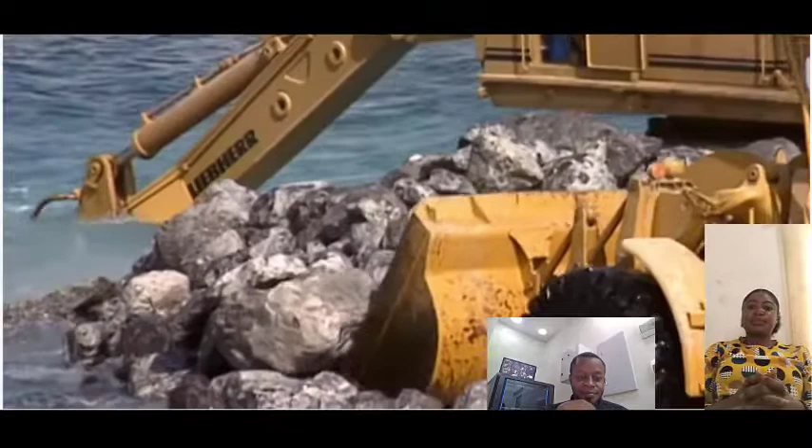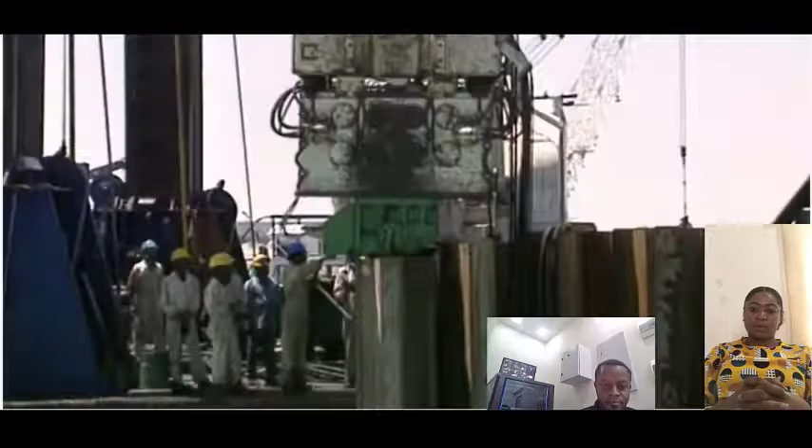In November 1994, construction begins on what is planned as the world's tallest and most luxurious hotel. The pressure is on from day one. With the eyes of the world watching, no one on the project will want to disappoint this particular client. Sheikh Mohammed bin Rashid Al Maktoum, Dubai's crown prince, is the visionary behind this amazing building. The project is his response to the economic time bomb his country confronts, as his close advisor, Sultan bin Sulayem, knows all too well.

He knew that we don't have oil. He knows that oil is going to end someday. And they have two choices. Either go and do something about it and find other alternative ways to sustain the life for the people of Dubai, or sit waiting for help. Only 50 years ago, Dubai's a dusty backwater, home to pearl divers, coastal traders and Bedouin. Then, in the 1960s, prospectors discover oil. The sudden injection of millions of petrodollars transforms the sheikhdom. But geologists predict the oil boom will be over by 2016. The good life could end just as quickly as it began, when the wells run dry.

The answer to Dubai's economic survival lies in its geography. This tiny emirate, less than twice the size of London, is in the remote Arabian Gulf. But Dubai has three untapped assets: sun, sand, and sea. Facing future economic meltdown, Sheikh Mohammed makes a crucial decision. He will turn his country into one of the world's most exclusive holiday destinations, a playground for the rich on the Arabian Gulf Coast. The Sheikh needs a luxurious centerpiece to launch his country into high-end tourism. He stakes what some speculate is over $1 billion on the tallest, most lavish hotel in the world, with a unique 7-star reputation, the Burj Al Arab.

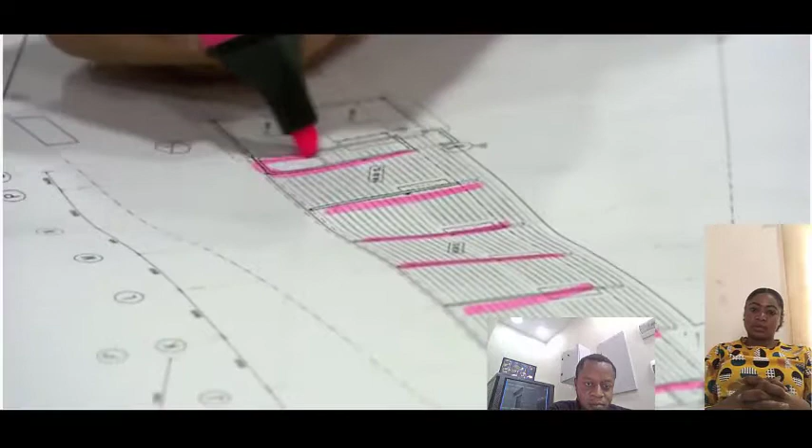Tom Wright and his colleagues have a reputation for innovative engineering, but they're more used to designing schools and offices. But Dubai is a place where connections can make all the difference. Through a contact in the ruler's office, the team gets its break. Sheikh Mohammed agrees to a meeting and is so impressed with their initial concepts, he awards them the contract.

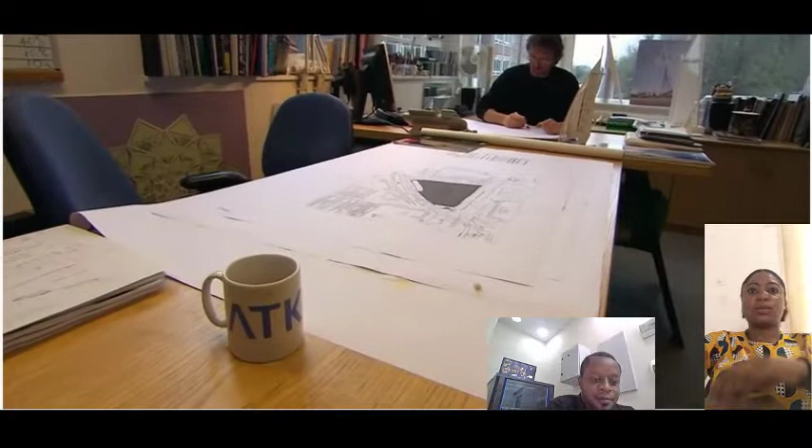Now Wright must turn his sketches into a design so remarkable, the building becomes a world-renowned landmark. We had many sleepless nights worrying that the building we'd designed wouldn't turn out to be at all iconic. Wright knows he must push his design to the limits. A building only becomes an icon when its form is simple but unique.

We decided that if you could draw a building simply with a few strokes of a pen, and it was instantly recognizable as not only the building but the place, Dubai in this case, you'd created something that was iconic. So if you consider these buildings in the world, there are probably no more than 10 maximum that have actually achieved this status.

Australia, Sydney Opera House. As with all these buildings, it's usually just the first couple of lines that actually make you know exactly where the building is. Paris. And you have to put a flag on the top. Can Tom Wright and his team compete with the likes of Gustave Eiffel? This is a once-in-a-lifetime challenge.

All the brainstorming pays off when Wright finally has his eureka moment. We were sitting there having a beer, watching the modern sailing yacht come out of the Dubai Offshore Sailing Club. You think of excitement, you think of exhilaration, and we went, hey, this must be the one. The form we came up with is very simple, and within a few lines, I think you can see that it has all the elements of an iconic building. It's simple and instantly recognizable.

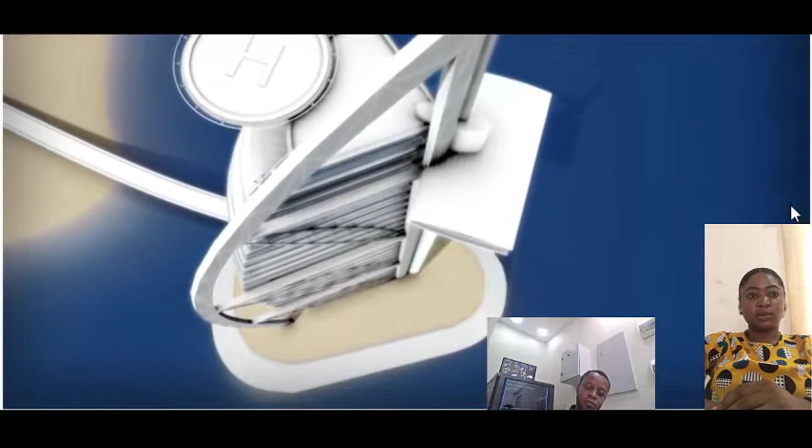This 321-meter structure, weighing 250,000 tons, will need to stand firm against earthquakes and Gulf storms. Wright has won the first of many battles. The Burj will rise out of the sea. But time and again, his refusal to compromise will force his colleagues to push the boundaries of engineering to the limit. By early 1995, the construction team is hard at work on Phase 1, building a low-lying island.

But the inexperienced architects are about to get a taste of Dubai's extreme weather. April the 27th. A powerful storm known as a shamal sweeps across the Gulf, hitting the coast with a vengeance. A set of construction barges lie in its path. Each is laden with 10,000 tons of rock. The architects have planned for all weather conditions, but the storm's intensity still shocks Simon Crisp. We had 3 or 4 metre waves bashing onto the beach. To see the waves coming in like this was really quite a wake-up call for us.

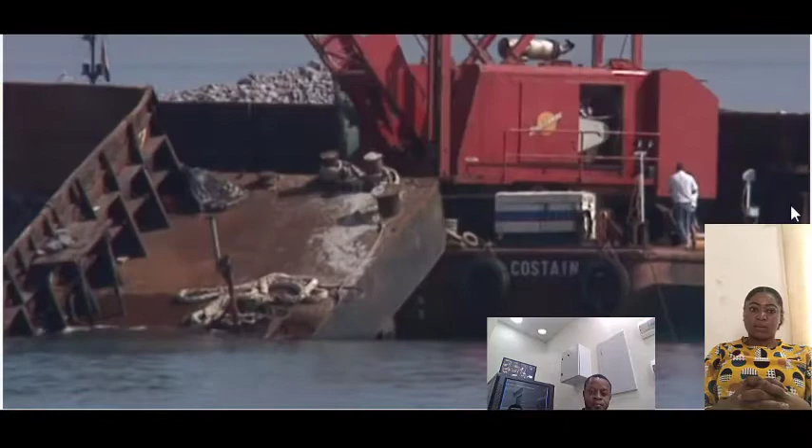One huge barge breaks loose and slams into the mainland. The team realizes the damage this kind of storm could inflict on their island hotel. We had a really graphic example of how powerful the Arabian Gulf can be when it's angry. The architect's decision to expose their structure to these forces could have serious consequences. The engineers will have to struggle to produce a low-lying island capable of resisting nature's fury.

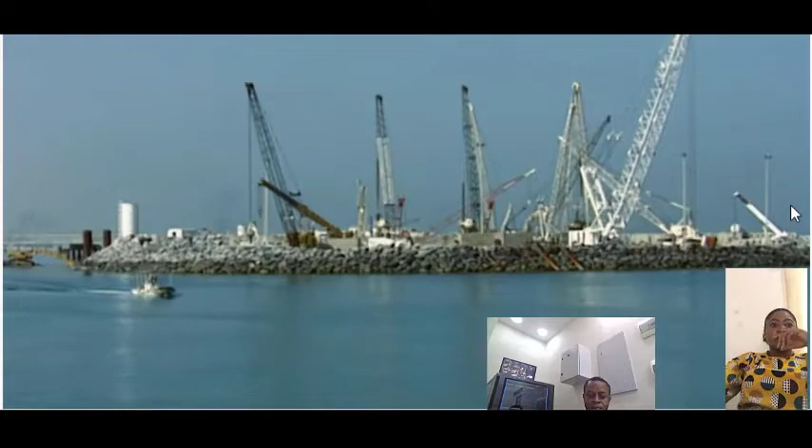The man-made island for the world's tallest hotel has hit a critical stage just 5 months into the build. Dubai's Sheikh Mohammed is depending on this project, the Burj Al Arab, to convert Dubai to a top-class tourist destination. But a debate rages over the island's height. Architect Tom Wright wants to make it low to give the impression of a sail rising out of the water. We argued a lot about the height of the island. From a design point of view, I wanted people to be close to the sea.

From the start, he's gone head-to-head with engineer Mike McNicholas, who's responsible for the island's safety. So I wanted the island as low as you possibly could, you know, skimming the sea. I'm coming from the other end, needed to make sure we were protecting the island. McNicholas's worst fear is that waves breaking over the island could damage the hotel or even drag guests into the sea.

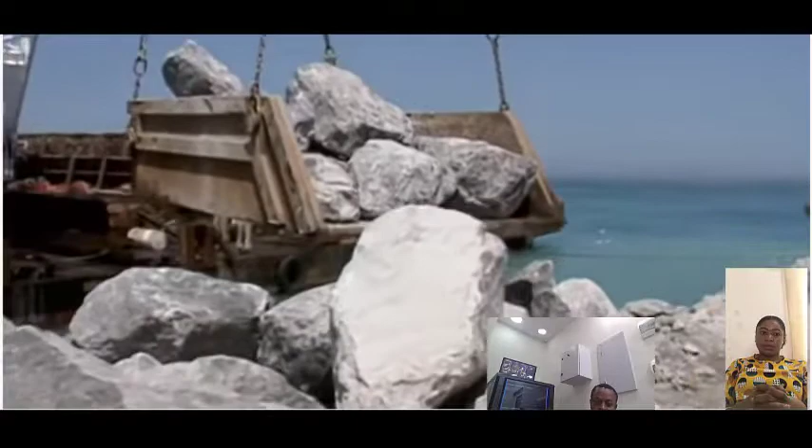Initially, the engineers planned to build the island using rocks. They are available locally and the technology is proven. But Wright rejects this. A rock island would have to be far too high to repel the sea safely.

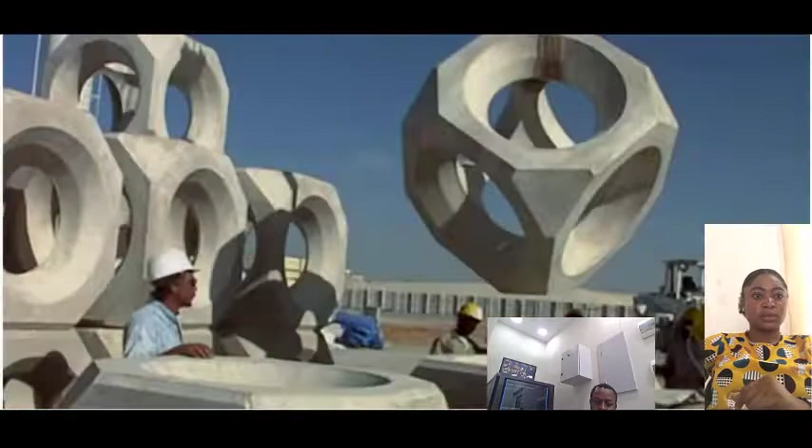To keep the island low, McNicholas experiments with pioneering concrete blocks designed to reduce the impact of waves. But no one in the Gulf has ever used these blocks before. I had to insist with the team that we carried out tank testing. It was the only way we were going to be sure that the island would be safe.

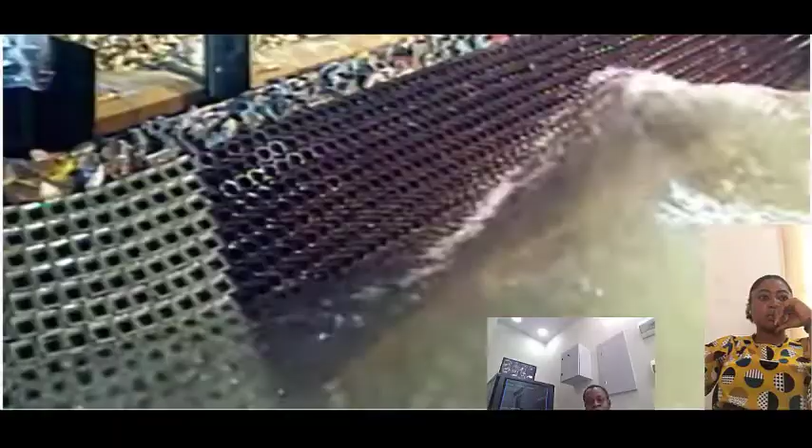These tests replicate the power of the tallest waves that can occur once in 100 years and send them crashing into a series of differently configured models. 3 weeks of testing prove the hollow blocks will work.

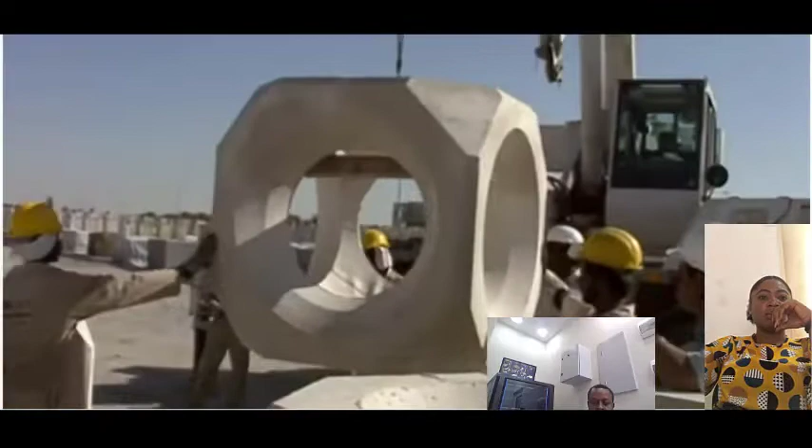The construction team builds the island with steep rock slopes, then covers them in concrete armor to absorb the force of the waves. These ingenious blocks work like a sponge. As the wave hits, the water passes inside the space and turns around on itself. The force is largely dissipated.

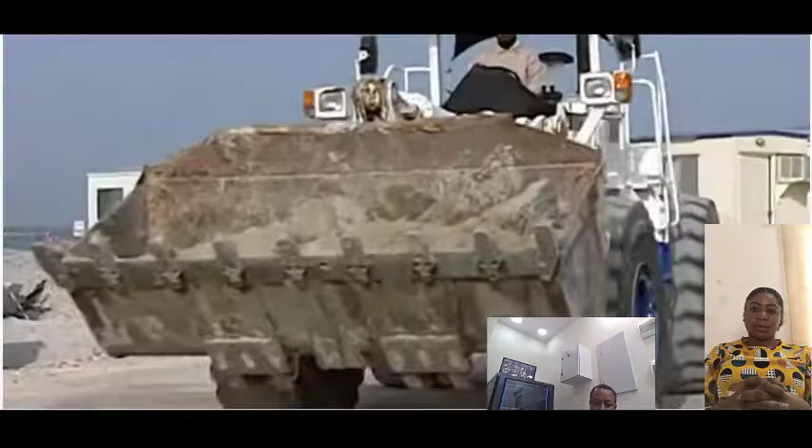With the engineers' help, architect Tom Wright has won his battle for a secure island that rises only 7.5 meters above the waves. Now the team begins the second stage of construction.

In the center of the island, construction workers drive huge lengths of steel 20 meters into the ground. This creates a triangular steel wall known as a cofferdam, which will become the outside of the hotel basement once they excavate the sand from inside. But removing the sand could be dangerous.

That was a real challenge for us. It's sleepless days and nights, 7 days a week. How we were going to stop the seawater coming into the structure, how we were going to stop the seawater coming around our structure from beneath and flooding it.

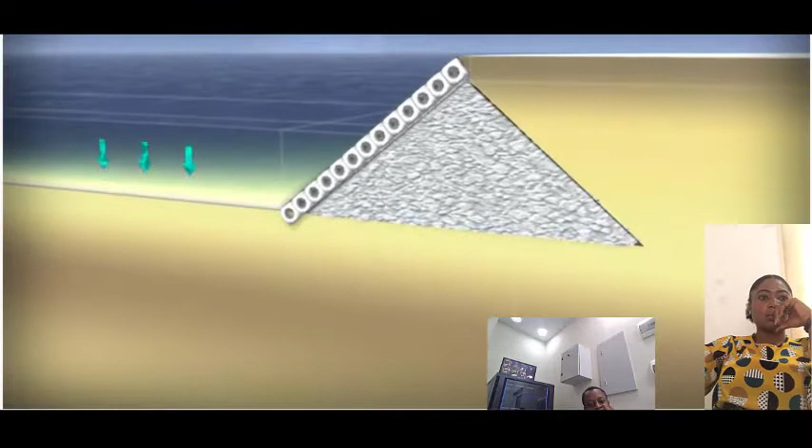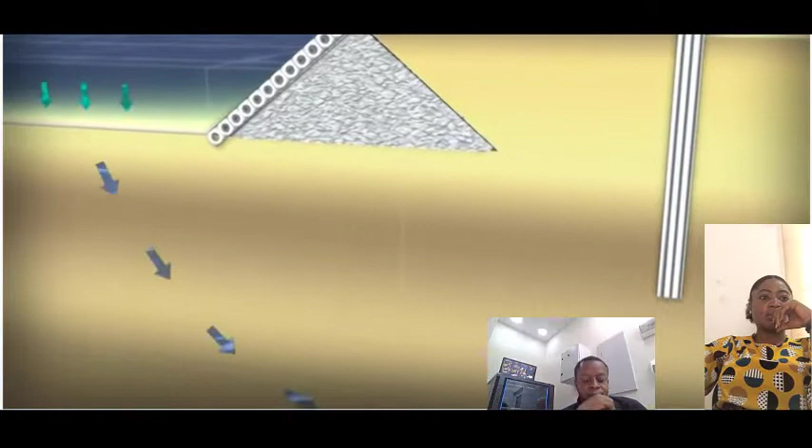The weight of the sea is a huge force on its bed. This pressure forces water through the sand and threatens to flood the artificial island from beneath. To keep the sea out, McNicholas injects liquid cement into the sand to seal off his steel wall from below.

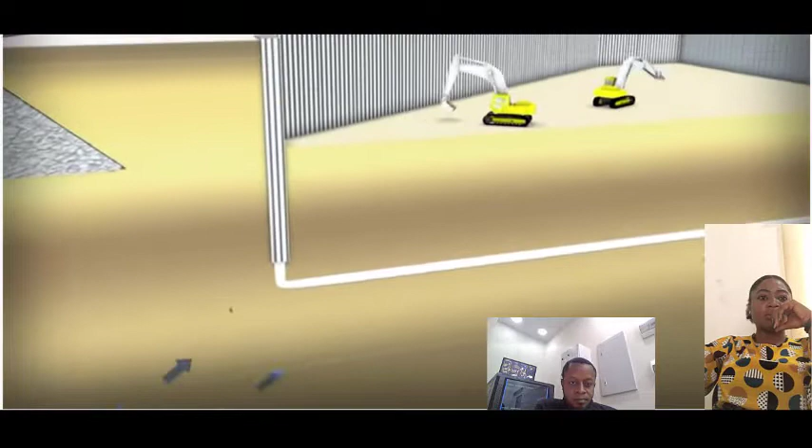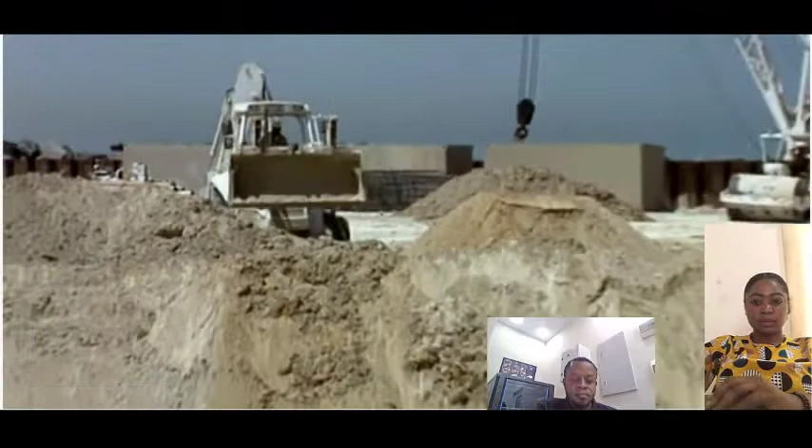But as the sand is removed to form the basement, there's less and less weight to hold back the force of the sea. The cement seal is going to be tested to the limit. In the worst case, the pressure caused by that water movement could have blown the whole bottom of the excavation like a champagne cork. If McNicholas's calculations are wrong, the excavation could be swamped, killing hundreds of workers.

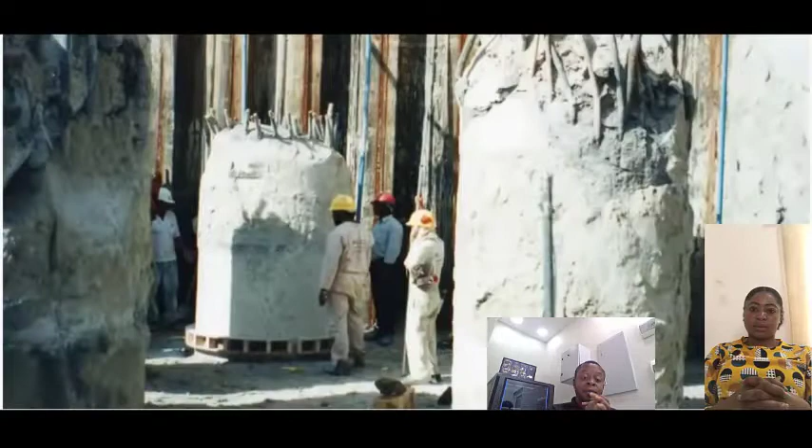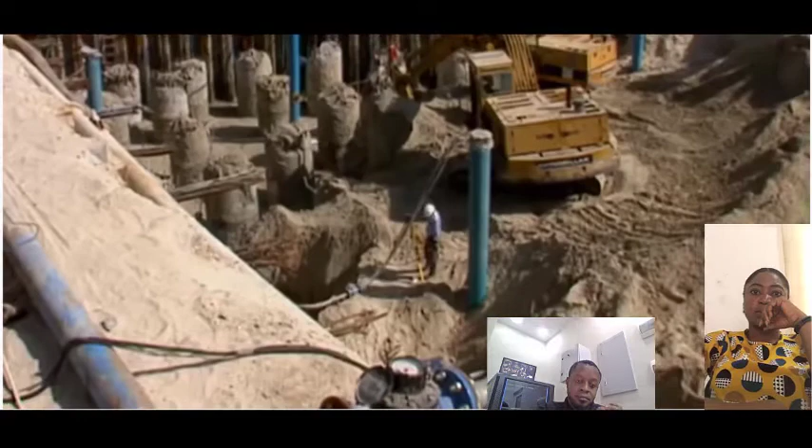But he stands by his design. With the cement seal in place, the excavators begin to remove the sand. As the man responsible, he's not going to let the workers face the risk alone. I felt I had to be one of the first guys down at the bottom of the excavation, looking up 10 meters above myself, thinking, each side of this cofferdam is 7,500 tons of sea pressure pushing in.

When put to the test, both wall and seal hold firm. And one of the probably proudest moments of my career was being stood on that excavation and looking around and seeing the steel wall there surrounding me and thinking, we are holding back the sea. My design worked.

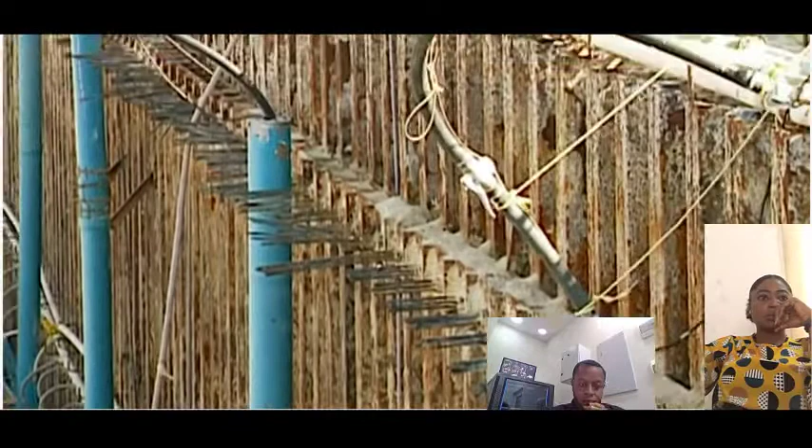November 1995. The artificial island for the tallest all-suite hotel in the world is now complete. The construction team starts phase 3 of this one-off project, the foundations. The support needed for any skyscraper is vast. But the location of the Burj Al Arab presents an added challenge.

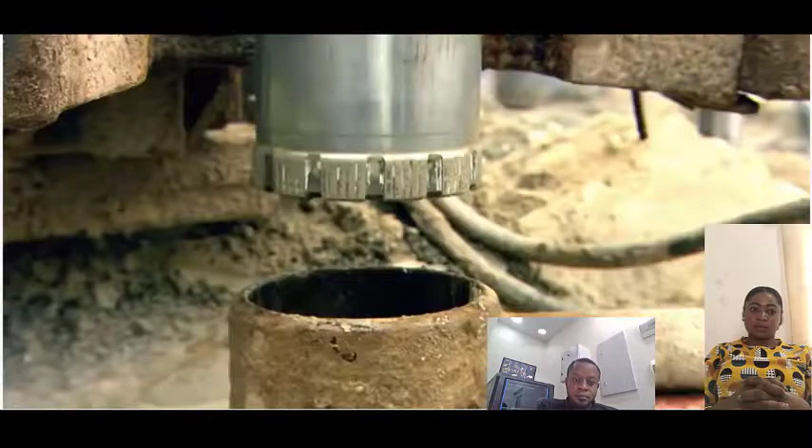It had never been done before to build something like this on reclaimed land. I mean, we're talking about a 300-metre high tower on a man-made island in 6 meters of the Arabian Gulf. The problems multiply when the results of earlier core tests reveal bad news. The team searching for bedrock drilled deep into the seabed. But even a full 180 meters down, there was no solid rock.

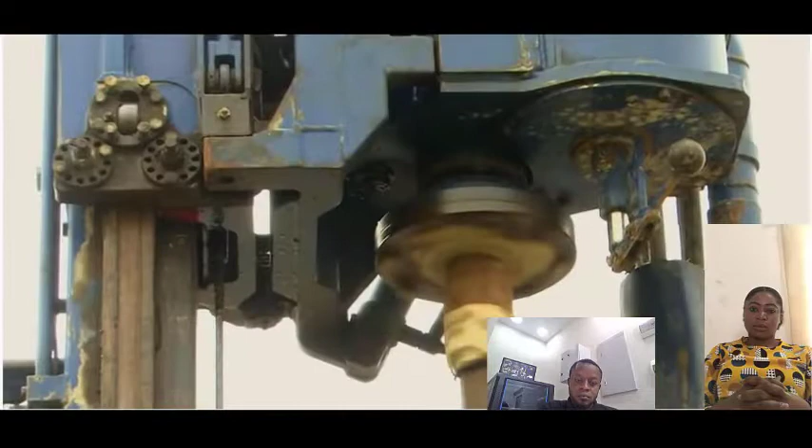This will make their job tougher, but the architects remain defiant. The average person would think we're crazy to build something like this on sand, let alone out in the water. How will this 300-meter structure stand firm against earthquakes and winds of close to 150 kilometers an hour when its foundations depend on nothing more substantial than sand?

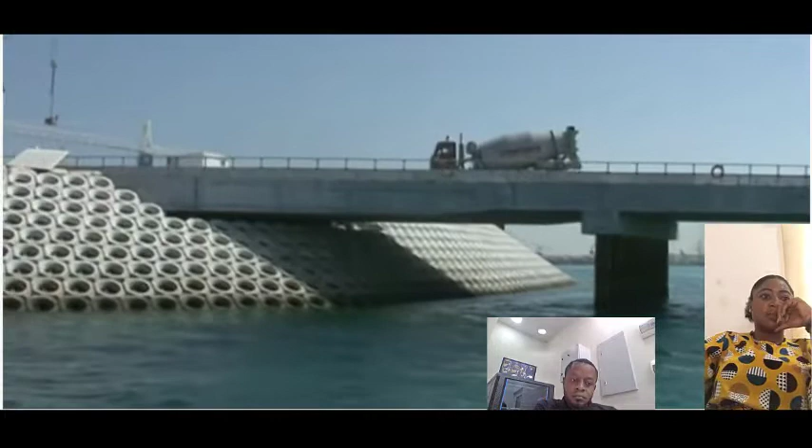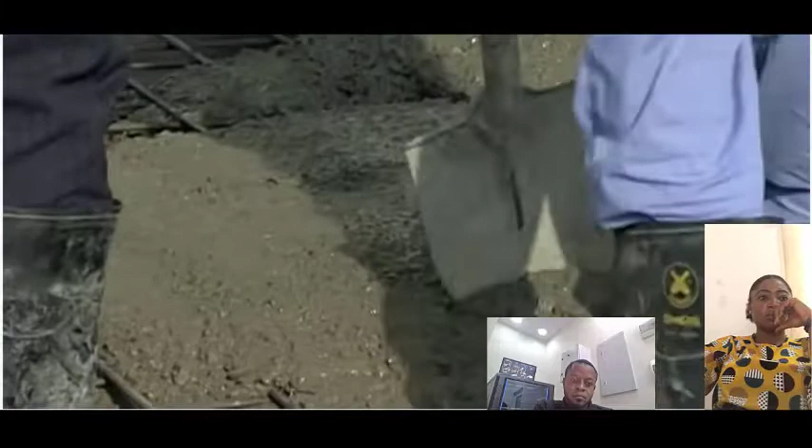On an artificial island 280 meters off the coast of Dubai, construction workers are preparing the ground for the tallest hotel in the world, the Burj Al Arab. But there's no bedrock beneath the site to support the foundations for a skyscraper. The architects have a plan. They want to support the Burj using steel-reinforced concrete foundation piles drilled deep into the sand.

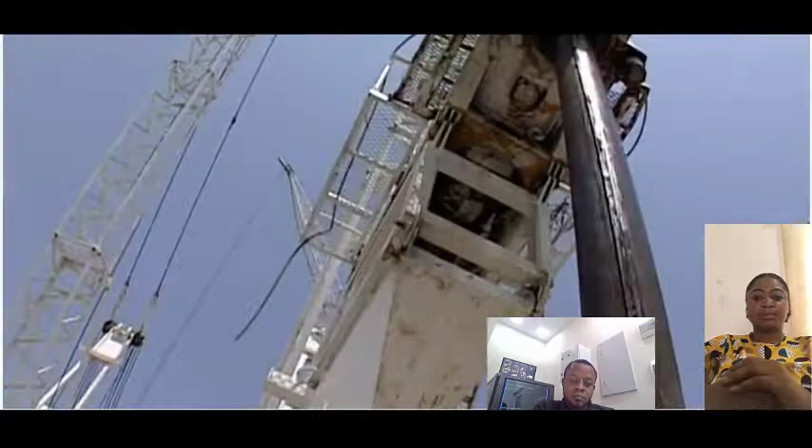So, what's to stop the whole structure from just sinking? They are relying on an effect known as skin friction, the resistance that stops two rough surfaces slipping past each other. Skin friction is all about the contact between the sand and the surface of the pile. And the longer the pile, the further in the ground it is, the greater that effect. And I'm going to demonstrate it now by whacking it in.

You'll see it starts to move quite quickly with the first few impacts. Now it's starting to stiffen up a bit, even though I'm not hitting it any harder or any softer, and the skin effect is starting to really kick in here. Once the friction between the post and the sand around it equals the load of the hammer, the post comes to a halt.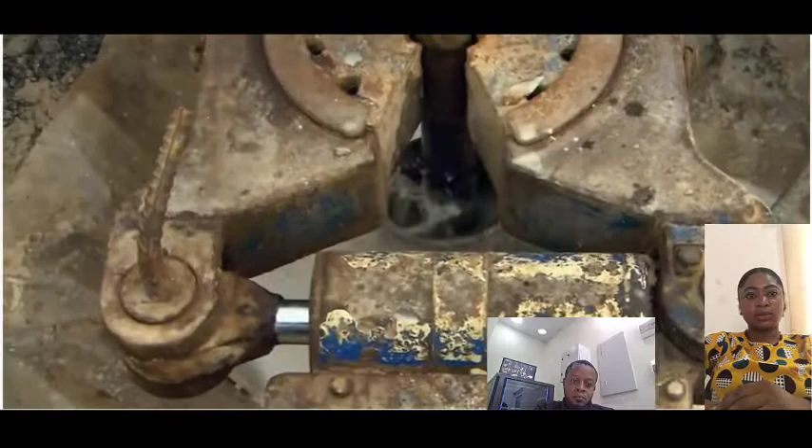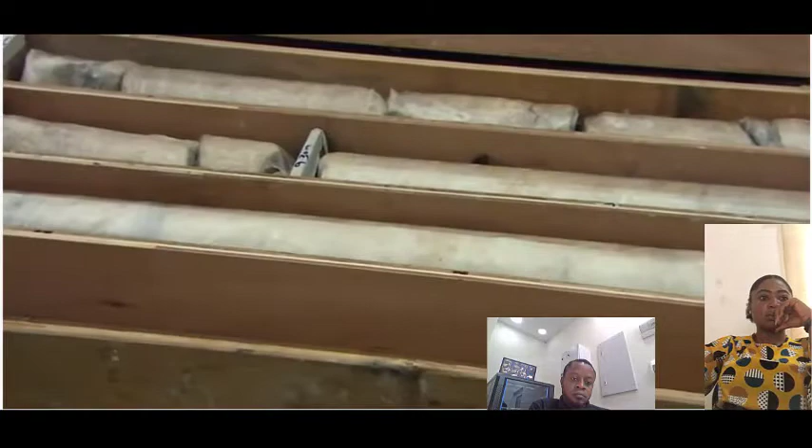The CRISP scheme will only anchor the Burj if the sand is compacted enough to create resistance around the building's piles. The drillers pack sand samples into sealed containers and send them off to be analysed. If the results show the sand is too loose, then support on the piles anchoring the building could suddenly fail. The geography of Dubai gives everyone reason for concern. It lies within range of a major fault line, so this soaring megastructure could be vulnerable to earthquakes.

1964, a 7.5 magnitude earthquake hits Niigata in northern Japan. Because the area is built on sandy silt, the tremors flip over entire apartment buildings. This isn't normal earthquake collapse. It's a devastating phenomenon known as liquefaction. As grains of loose sand shake, they fill up any air pockets and compact, taking up less space. The ground stops behaving like solid earth and acts like a liquid. On shifting sand, any building could simply topple.

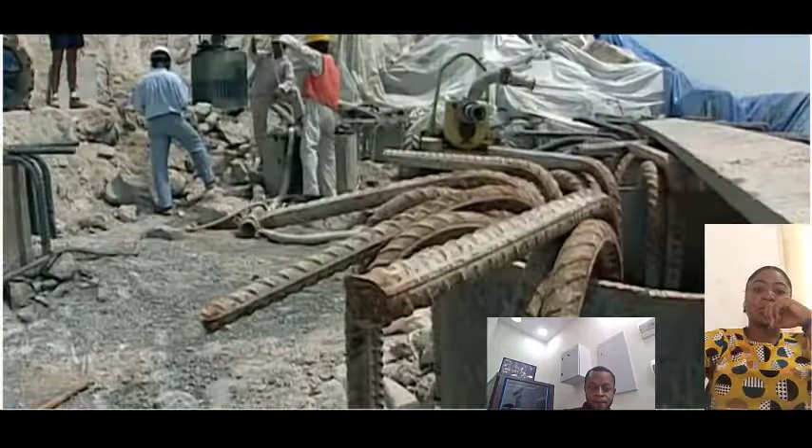When the results of the drilling tests return, it's good news. Deep beneath the site, they find compacted and calcified sand. Liquefaction is not a threat. But will the foundations be long enough for the skin friction to hold them firm? We weren't going to take any chances, and we extended the piles by another 8 metres. CRISP specifies foundations over 20% longer than originally planned. These 250 concrete piles have a combined length of 10 kilometres, 35 times as long as the towering hotel they will support.

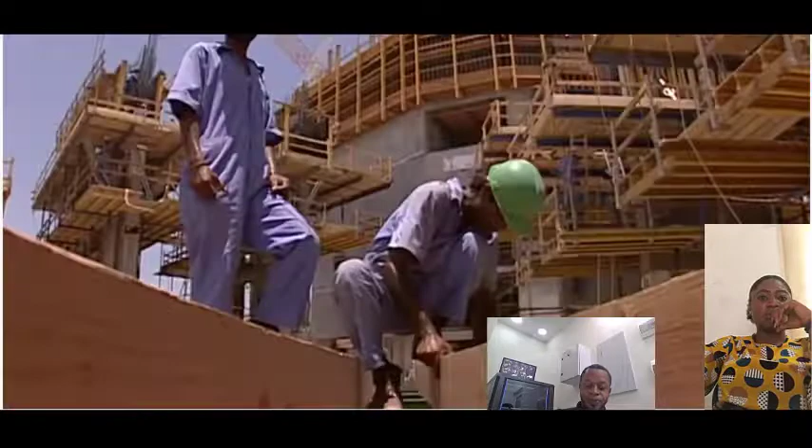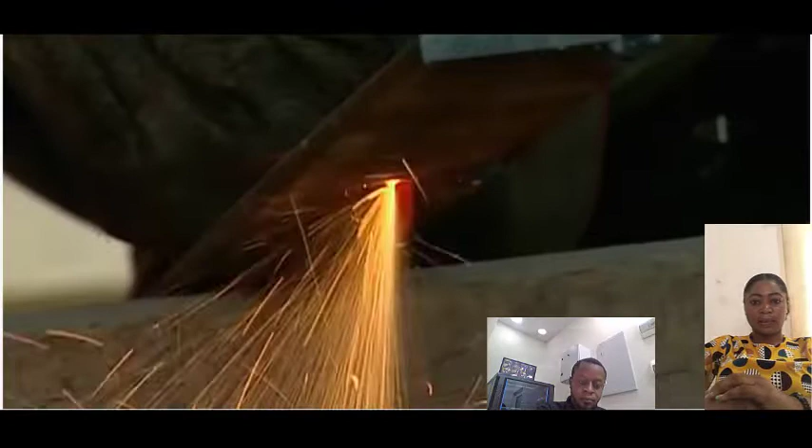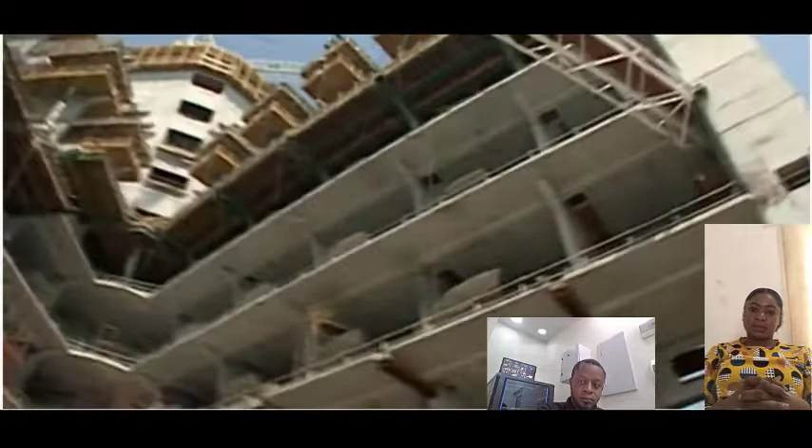One by one, the engineers are solving the challenges thrown up by this extraordinary structure. They brace themselves for a new set of obstacles as Phase 4, the construction of the hotel itself, begins. This building had to stand up to the worst that the Gulf could throw at it. The hotel itself has slender concrete walls, not capable of withstanding the elements alone. To hold them firm against high winds and earthquakes, the architect devises a visually stunning solution. A gigantic steel structure outside the main building, known as an exoskeleton. A series of vast diagonal trusses tie 2 huge steel bows to the concrete core at the back of the building.

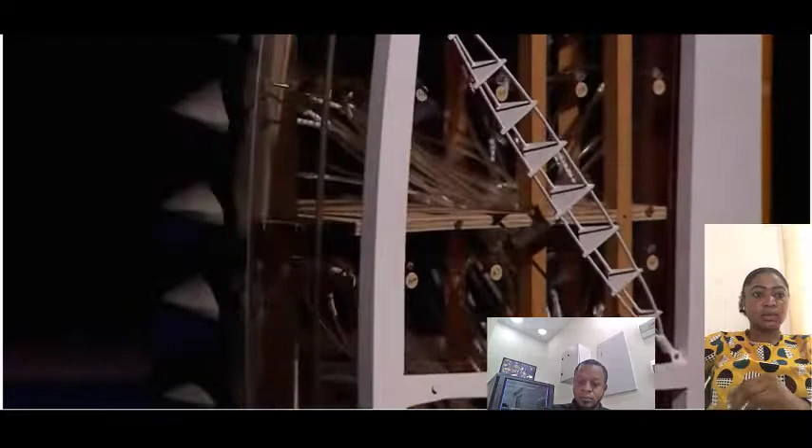Wright's design will make the building unique. But his giant diagonal trusses will make life hell for Anthony McCarter, the engineer who has to make them work. Those trusses gave me 4 months of heartache, sleepless nights, worries, anxiety. They must be incredibly strong to tie the exoskeleton together. But aesthetics are just as vital. It was critical that these diagonals were very, very elegant and also very beautiful as they're so visible. This building has to wow the world and make Dubai a must-stop destination. Wright's not about to compromise.

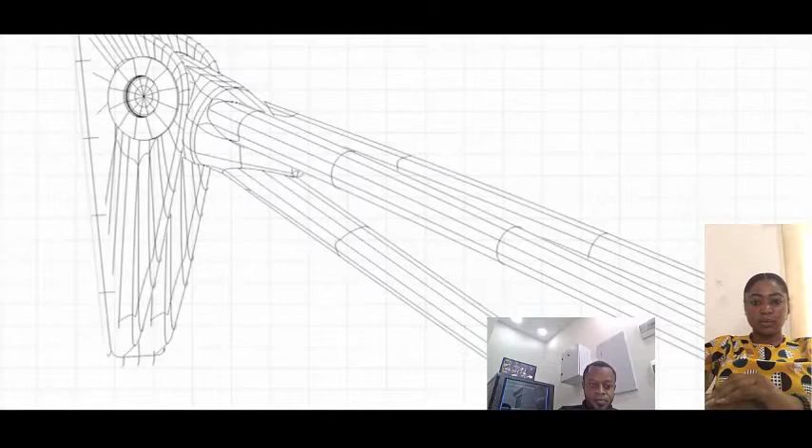I used to go to Tom with option after option. I remember one particular occasion where I had 7 options and he went, no good, no good, no good. Eventually, McCarter finds a form that works structurally and is graceful enough to fit Wright's vision. But this in turn causes nightmares for Malcolm Murphy, the chief contractor. It's okay for the architect to draw pretty pictures, but we have to build it.

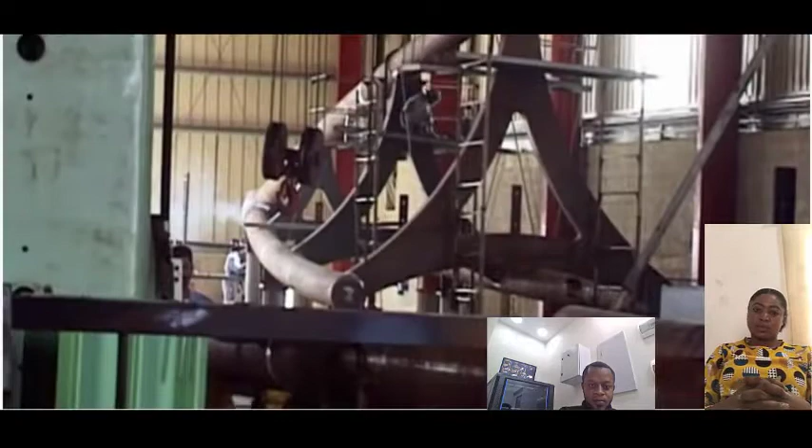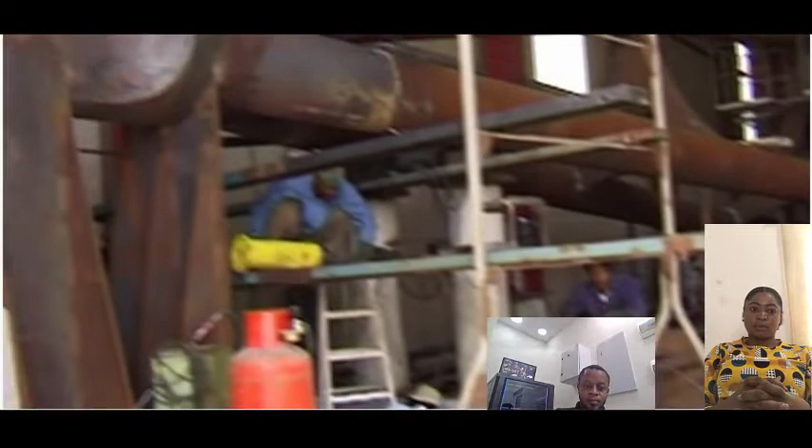He finds a factory just 15 kilometres from the construction site capable of welding the huge diagonals. Each one is longer than the Airbus A380 Super Jumbo and heavier than 20 double-decker buses. Welding these complex forms in the factory is the easy part. Transporting them to the site is not. With each truss weighing in at 165 tons and reaching a staggering 85 metres in length, it's no easy task. And the challenges to do that are just unbelievable.

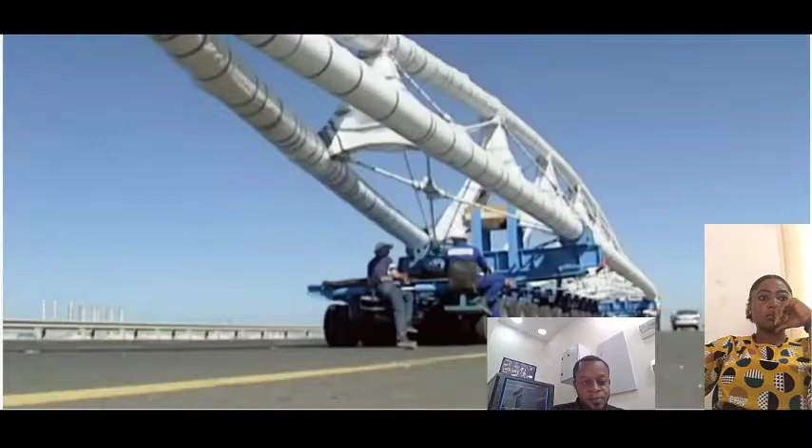No one has ever transported anything this size before in Dubai, but Murphy is not going to be beaten. He brings in one of the world's largest heavy lift transporters, a beast with a total of 80 wheels. It makes the slow journey to the construction site at an average speed of around 6 kilometers an hour. Police must close roads and remove traffic lights to allow this convoy through.

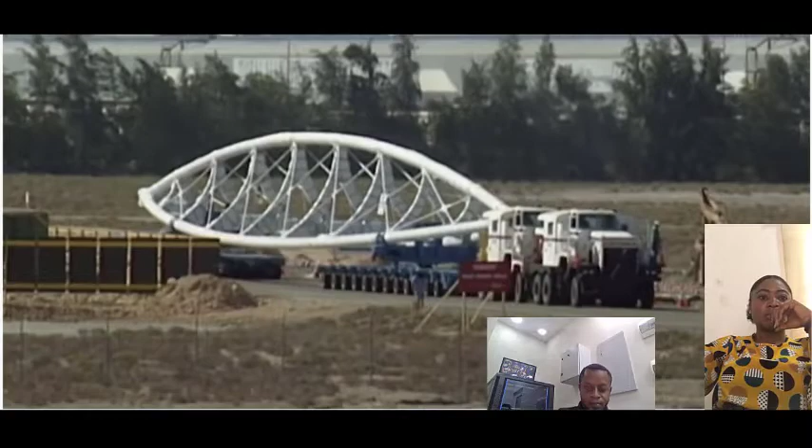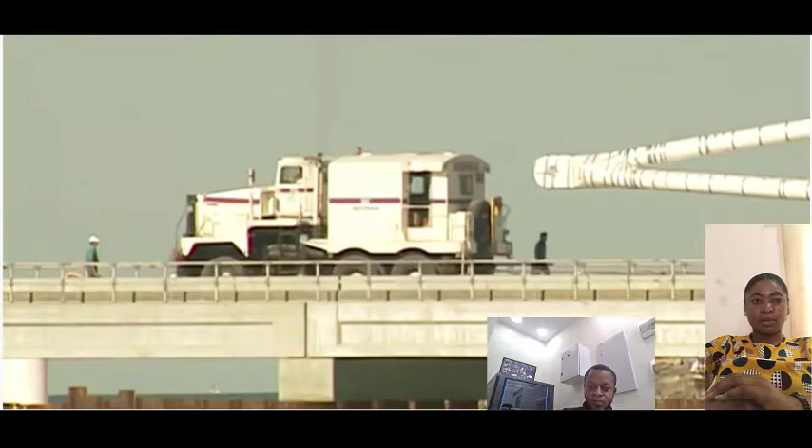When they finally reach the site, the contractors face their next hurdle. These 165-ton beasts have to be lifted into position. The architects refused us point blank to position these things in 3 pieces, which we wanted to do originally. And he said, no, aesthetics, I'll not allow you to weld up there. He has to find a way to lift the trusses in a single piece to a height of almost 200 meters, twice the height of the Statue of Liberty.

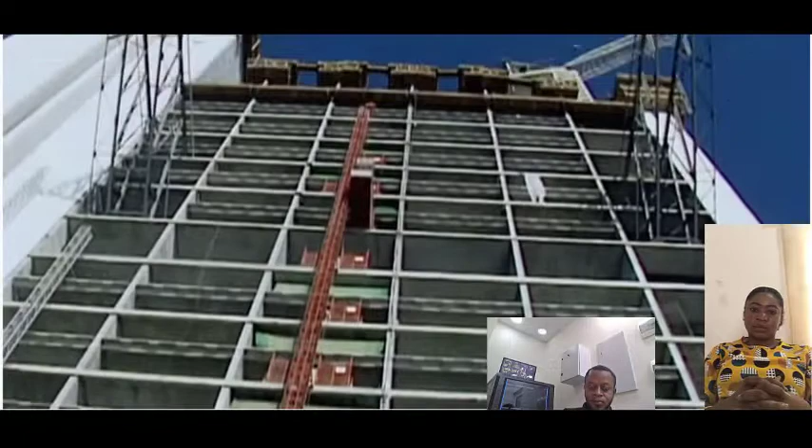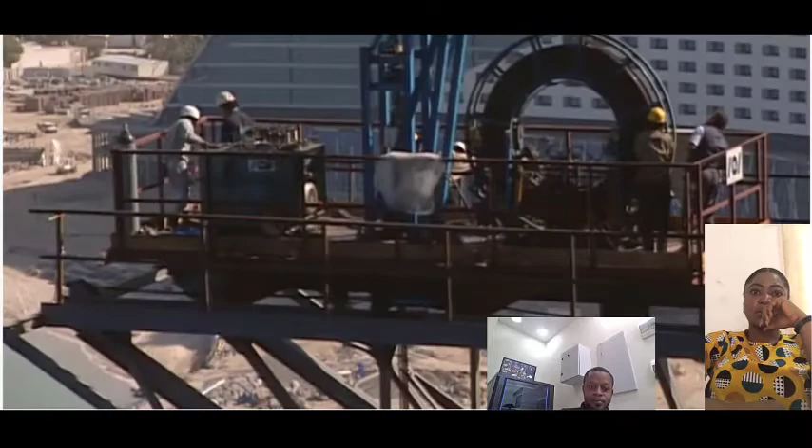We had to go away and think of an idea how to actually lift these monsters up. We had 3 big monster cranes in there, and even they weren't big enough to lift the diagonal trusses. Murphy must look further afield for a solution and brings in specialist lifting gear from Singapore. His team sets up winches, like those used on offshore drilling rigs, high on cantilever frames 15 meters from the building. Cables with a breaking strength of 225 tons are attached to the end of the truss.

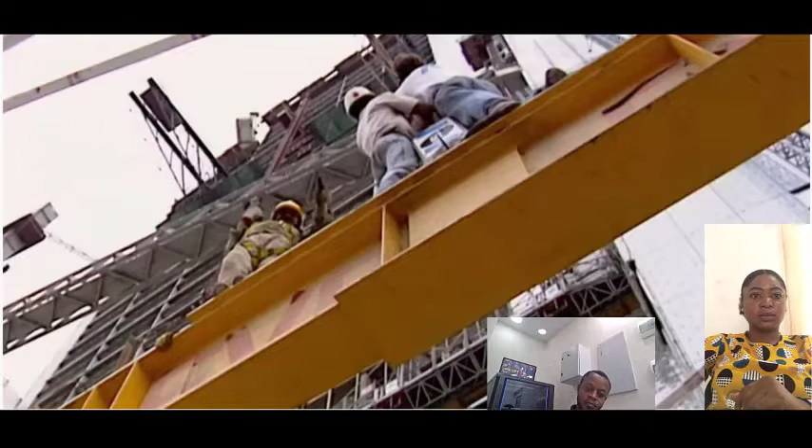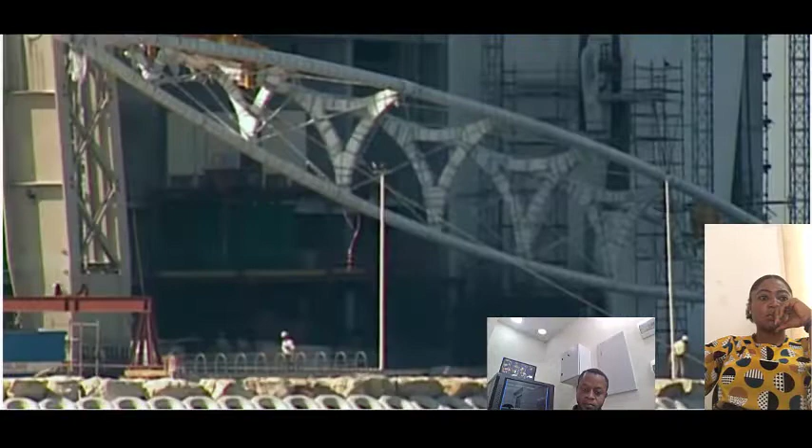I can assure you we were very, very nervous that morning when we lifted the first one. 30, 40 guys had sleepless nights that week, getting ready for that first lift. The 2 massive winches take up the strain and then painstakingly raise the diagonal truss little by little up the side of the building. It's all going to plan. Murphy and his team have solved that, but they need to fit into place with pinpoint accuracy.

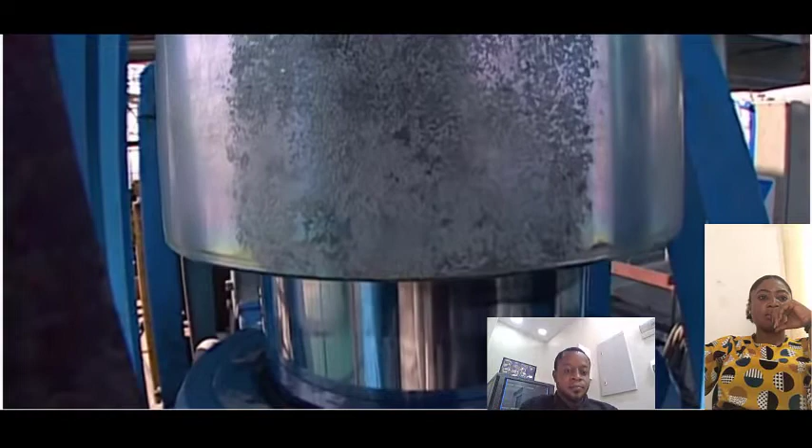But Dubai's climate means temperatures can vary by as much as 14 degrees in a single day. And this will make the trusses expand and contract dramatically. The problem's known as thermal expansion. The steelman's nightmare in the desert, working 50 degrees C. Steel expands in the heat and contracts when cold.

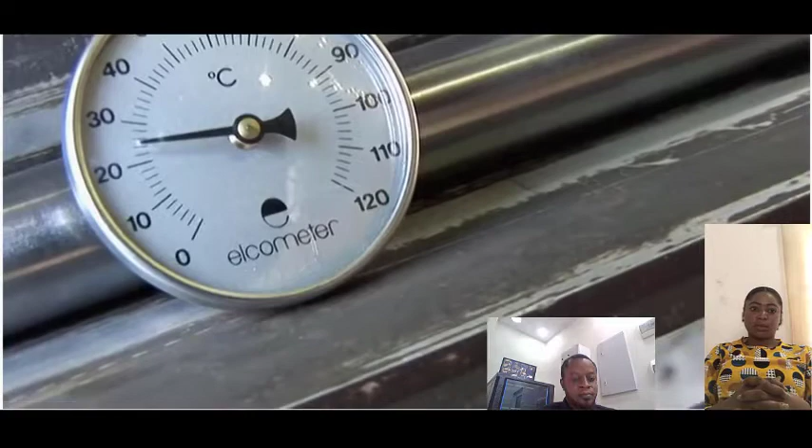Okay, chaps, light up. We're actually going to heat the steel up now, which is going to give you an idea of what temperatures we're working in the desert. Heat makes the steel molecules move faster and further. And this 15-meter tube actually grows in length. The difference is visible. What did I tell you? Steel does expand with the heat.

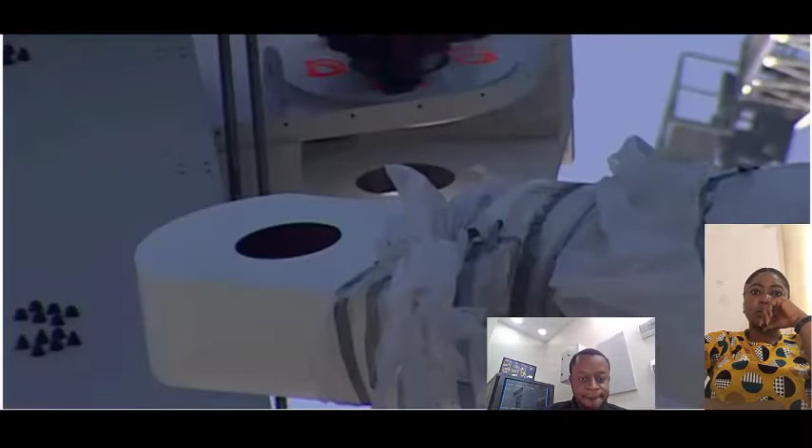The diagonal trusses on the Burj Al Arab could expand and contract by a full 5 centimeters over a 24-hour period. They will never fit their precise point in the framework without an ingenious solution. The engineers thought about it, the structural fabricators, the steel fabricators, the architects, everybody thought about it. And it was actually one of the architects came up with this great solution.

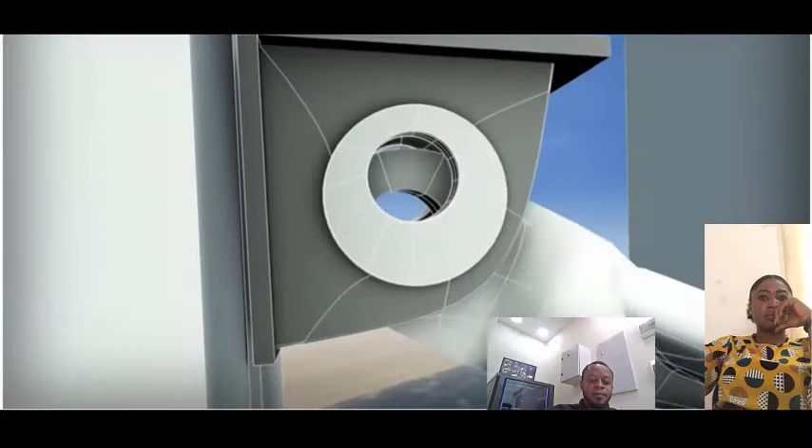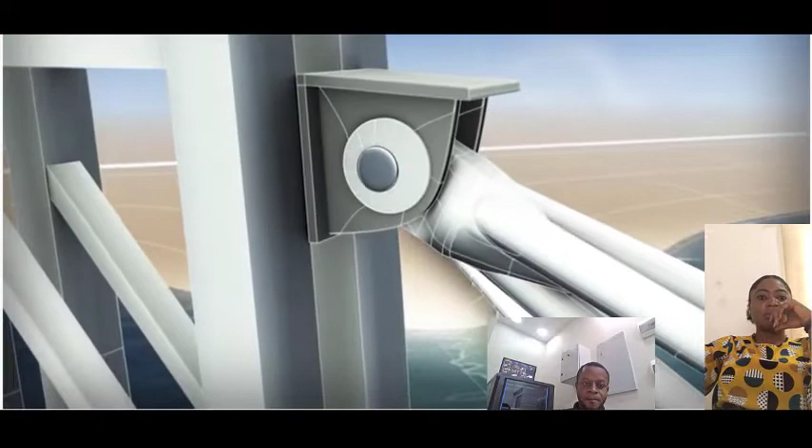On the frame of the structure, the fixing bracket contains a vast washer with its hole offset from the center. This swivels until it lines up with the hole in the diagonal truss. Then, the cast steel pin, about 30 centimeters in diameter, is inserted through both holes, locking them together. This clever device buys the team the crucial 5 centimeters of play they require for the installation, and the truss is now fixed securely in place.

When we got that pin in, we had those champagne corks flying. It was just unbelievable. But there's precious little time for celebration. The first VIP guests will arrive before the millennium. This leaves the team less than 36 months to complete the entire project. Sheikh Mohammed's vision for the Burj Al Arab meant that it was needed yesterday.

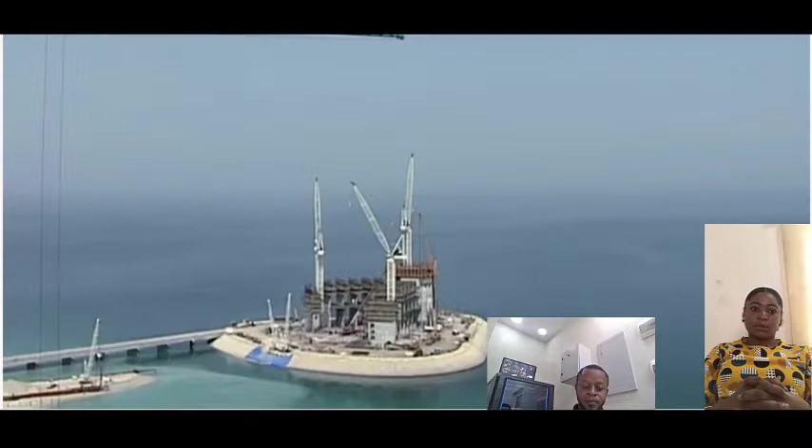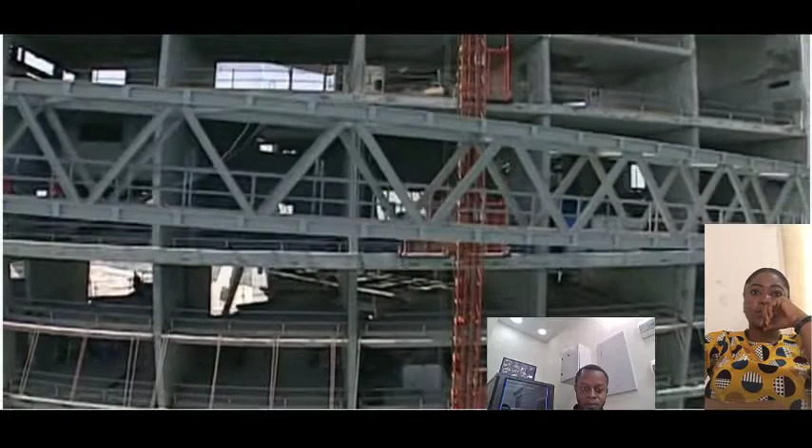January 1997. A colossus is emerging out of the Arabian Gulf. The Burj Al Arab is to be the tallest hotel in the world, the last word in luxury and a proud symbol for Dubai. Architect Tom Wright wants the building to be beautiful. The steel sections of the exoskeleton that will support it must be as minimal as possible. The view from these $2,000 a night suites will have to live up to the price tag. When you're in the suite, looking through the windows, they are right in front of you. So they have to be exceptionally well detailed and well put together.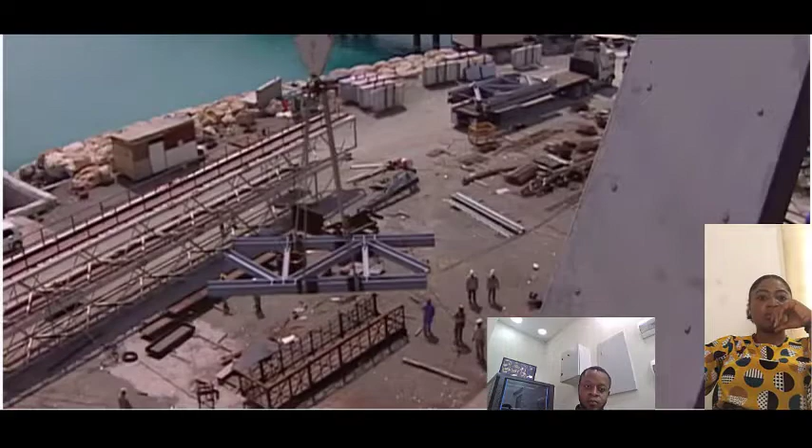But this creates a dilemma. If Wright makes the exoskeleton too light, the wind's force at 300 meters above the Gulf could shake the building apart. Too bulky, and the elegant form of his yacht-shaped structure is ruined. Once again, Wright and the engineers, who must make his hotel safe, are on a collision course. When you're designing a building that is taller than the Eiffel Tower, and you've never done one before, you want to make sure that you've got it right. This structure is so unusual. For the first time in Dubai's history, engineers decide to do tests in a wind tunnel.

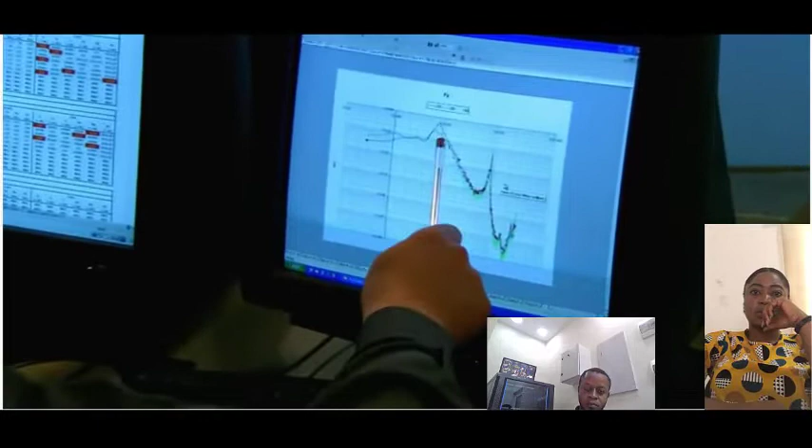Wind engineer Volker Buttgereit knows the Burj Al Arab is one of a kind. Before this building came along, most of the buildings in the Gulf were fairly orthodox shape. They were square, they were rectangular, they were nowhere near this scale. So doing a wind tunnel test for a building in those days in the Gulf was almost outrageous. But for this extraordinary structure, it's essential. The wind tunnel simulates the wind effects of the Gulf around this 1:50 scale model.

This building has seen some pretty severe loads, almost twice what it would see in London. We measured suctions which were of the order of the weight of a car hanging off, trying to suck the panel off the building. So that's quite something. The wind tunnel throws up results that could threaten the entire exoskeleton.

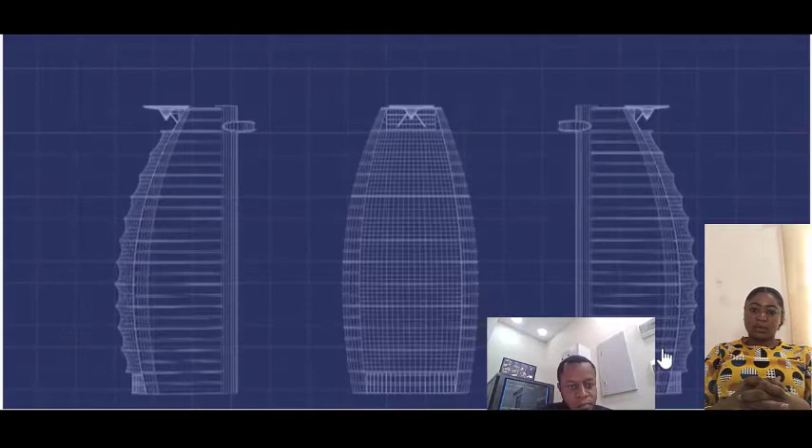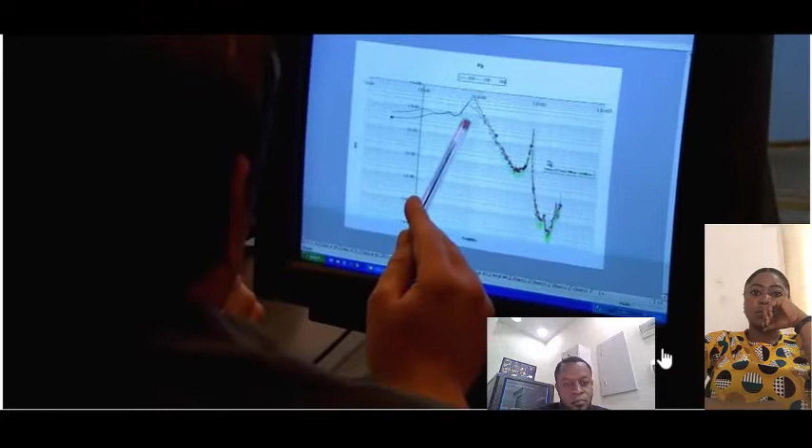The simplest solution is to change the aerodynamic shape, but that upsets the architect. The architectural idea of the exoskeleton structure is, when you look at it, the very essence of the building. If you take it off, it's just another building. If you put the exoskeleton structure on, you have an icon. The engineers need to think again. This is classic vortex shedding. We realized we had to come up with something clever that was not visible but somehow reduced the motion.

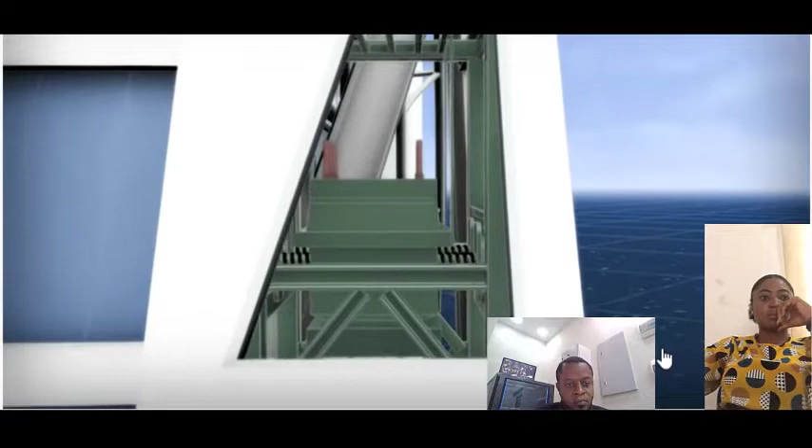They turn to an ingenious hanging weight called a tuned mass damper. These are installed at vulnerable points in the exoskeleton. When the wind blows and vortex shedding starts to create dangerous vibrations, the 5-ton weight will swing instead of the structure and damp down the vibrations to well within safety limits. 11 of these systems are fitted from the top of the 60-meter mast all the way down through each of the steel bow structures. These dampers safely cancel out the threat.

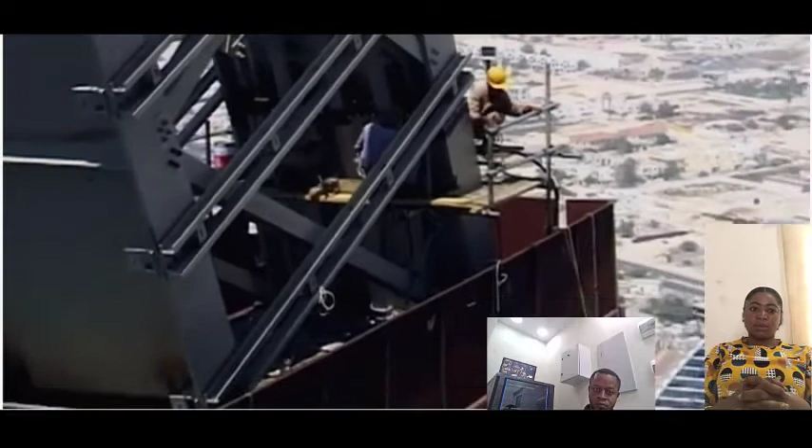June 1997. Dubai is reinventing itself as the luxury tourist destination. This old hotel bites the dust as the Burj Al Arab, the symbol of the new Dubai, approaches its final form. Just 30 months before the deadline, the crew begins constructing the toughest engineering challenge. Sheikh Mohammed wants the building to amaze. So the design calls for a restaurant that looks as if it's suspended in the sky.

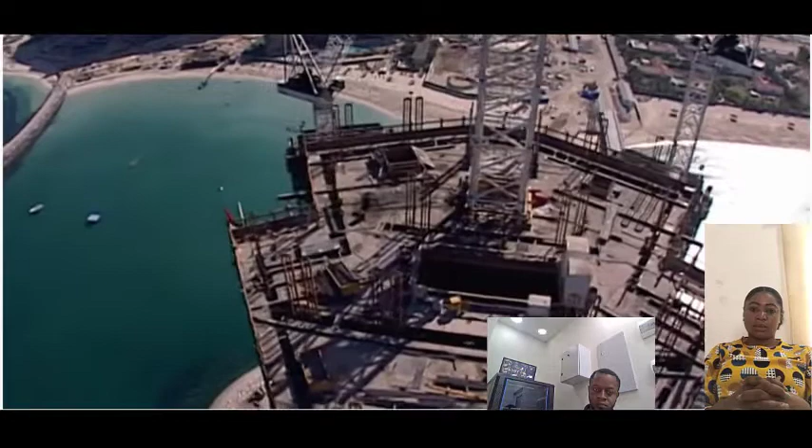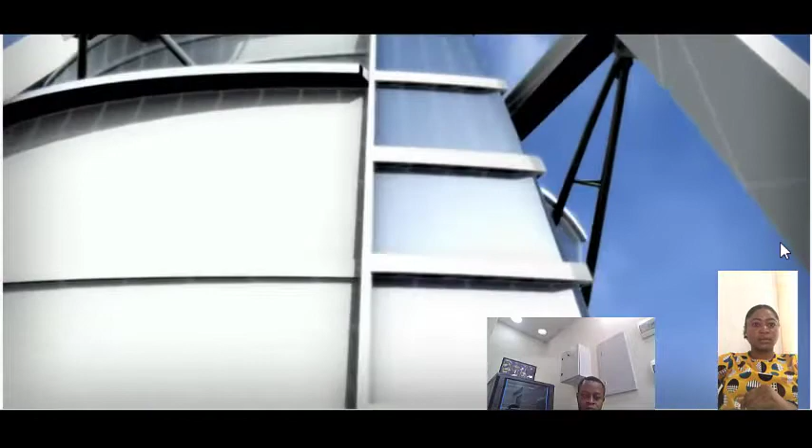I like the idea of the visitor sitting out in space, looking across the view towards the Arabian Gulf and Dubai, and sort of almost floating up in the clouds. The whole idea of hanging out over space would give you a dining experience pretty unparalleled. The Al Muntaha, or Ultimate Sky View Restaurant, will soar 200 meters above the sea and project nearly 27 meters out on both sides from the building's narrow central core.

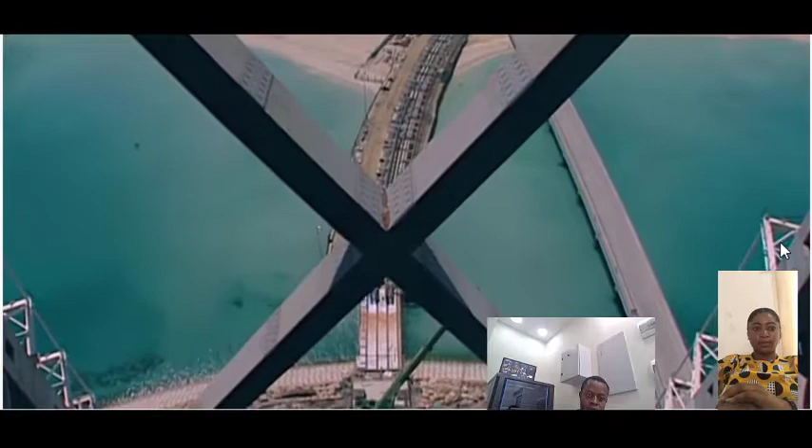Once again, Wright's throwing down a gauntlet to structural engineer Anthony McArthur. Can he secure this eccentric wing-like structure with no visible means of support? When Tom first showed it to me, I must admit I thought it was crazy. This room is actually the size of most buildings, and Tom decided that he wanted to take it and stick it outside of the centre of gravity of the supporting structure. So there it was, dangling in the breeze with only the structural engineer to hold it up. And if the engineers get the calculations wrong, the whole thing could tumble 200 meters to Earth.

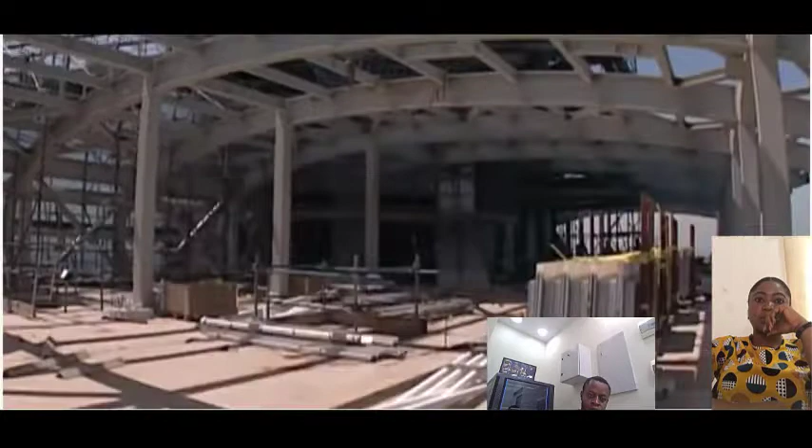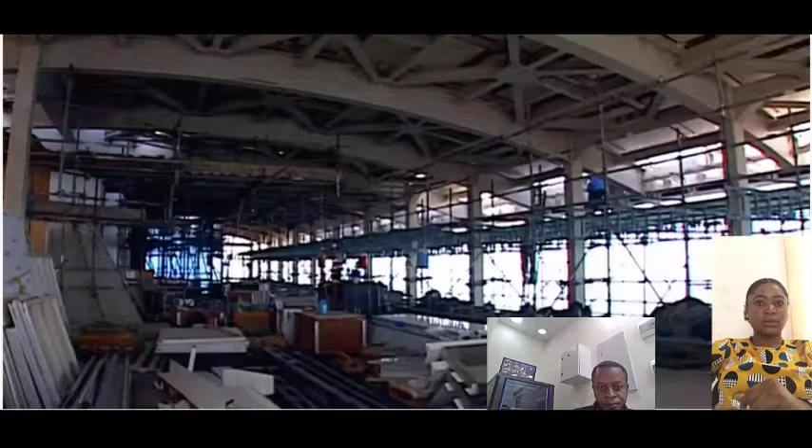McArthur finds a solution to the pull of gravity that pushes conventional engineering to new heights. In the concrete core at the back of the building, he casts a series of steel brackets known as embedments. 10 enormous steel girders radiate off them, up to 1.6 meters high. These beams form the base of the rigid steel floor. The wing-like exterior can be attached to it, and then the entire restaurant is enclosed in aluminium and glass. This gravity-defying structure will survive winds of close to 160 kilometers an hour. It's an engineering triumph.

Okay, right, thank you for watching this video with us. It's actually a very long video, but we learned a lot. The construction process was actually, wow, especially some of the technologies.